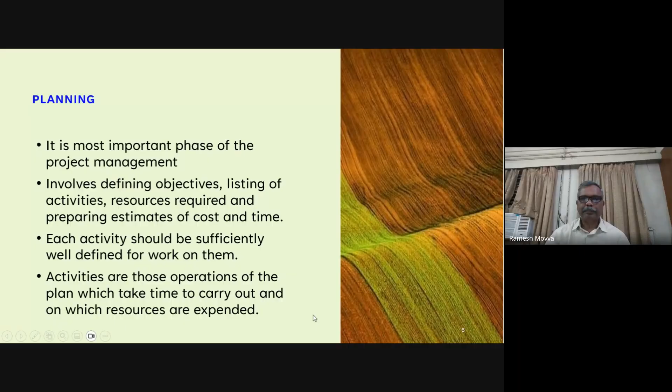Once your plan is ready, you go to the next phase, scheduling. Scheduling is basically integration of all the activities you have planned, assigning the durations and resources. In the earlier phase you have just defined the resources you need; in this phase you assign the resources and the sequencing of the activities - which comes first, which comes second, which can be done in parallel, which can be done independently, and which need to be done in sequence.

Once you interlink all the activities, you call that schedule the baseline schedule. In the baseline schedule, normally your target date will match your project requirement. This planning and scheduling phase is undertaken before you actually start the project, so you have to do a couple of iterations where you may be exceeding your budget, or exceeding your timelines, or both.

Then you need to go back and check where you can cut down on the project cost or cut down on the durations. After a couple of iterations, you will be able to come out with a plan which is within your budget as well as within your required timelines.

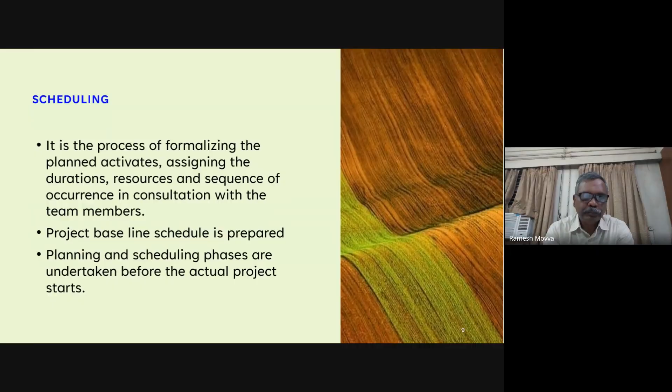Then comes the controlling phase. Once the project is undertaken, the project activities start progressing. For bigger projects we normally use software like Primavera or Microsoft Project. For example, in our Vizag steel plant, we have about 7,000 activities approximately for monitoring this 2.8 million ton steel plant, with about 16 zones and various activities in that.

If you have software to monitor the project, your life becomes easier. Complex projects cannot be monitored using a bar chart or arrow diagram networks. So we mostly use Microsoft Project and Primavera. Microsoft Project can also be used for planning purposes.

It is very easy to use and can be used for smaller projects. But we preferred Primavera because it has got very good scheduling capabilities and interlinking capabilities with activities, scheduling, monitoring, and it has a facility for adding resources. You can schedule it at regular intervals to arrive at what is your progress of project with respect to the cost you have spent.

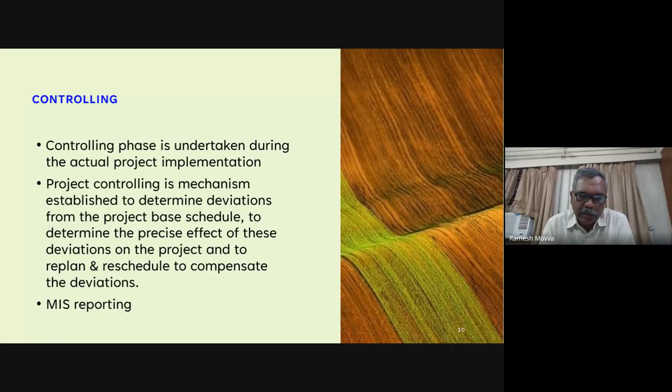After everything is done, we report the outcome of this controlling process to management in the form of an MIS report - MIS, basically management information system reporting. Once the reporting is done, it is reviewed by various levels of management, and then they act on those reports.

And the last phase of the project is closing. The closing phase is very, very important, because unless you complete and close the project and get out of the place, it remains pending on your project list for a very long time.

Once the project is commissioned, the client accepts that the project has performed. For example, in case of a blast furnace project, the performance is considered completed when it produces 66% of rated capacity. Say if rated capacity is 6,000, then about 4,000 tons production means the project has achieved its required goals and can be taken over. Once the project is taken over by the client, everybody gets relaxed.

In our practical experience, what we face is that a good amount of payment is made by the time the project is taken over - about 85% of the payment is given to the contractors once it is commissioned.

Then come the other activities like handing over of the site, preparation of as-built drawings, or preparation of final bills. All this gets pushed to the backbench. They also have to prepare all the lessons learned and document what you actually built - preparing an as-built schedule as well as as-built documents.

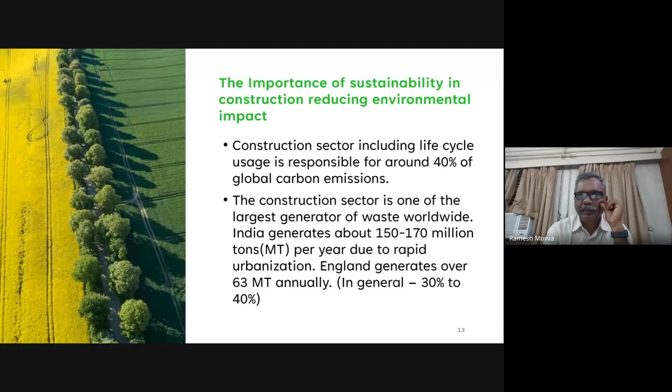So this is a very huge figure that needs to be tackled in future. Actually, there is no regulatory compliance - no mandated regulatory compliance for green emissions to prevent environmental degradation or use of environment-friendly materials in any part of the world.

But the World Green Building Council is a body which consists of various - every country is now trying to take care of all these environmental related sustainability policies. So now the Green Building Council has put up resolutions: by 2030, all new constructions and renovations will have at least 40% less embodied carbon.

This embodied carbon is basically when you use materials, including steel, cement, insulation, energy, piping, and all plastics. And all new buildings must be net zero operational carbon - that means when you are occupying the building and using it, the carbon emissions must be zero. By 2050, all new constructions and renovations will have net zero embodied carbon as well as net zero operational carbon.

But these targets are only voluntary on the part of the various governments. However, in coming years we may see some regulations where it may mandate certain laws and regulations to control this phenomenon.

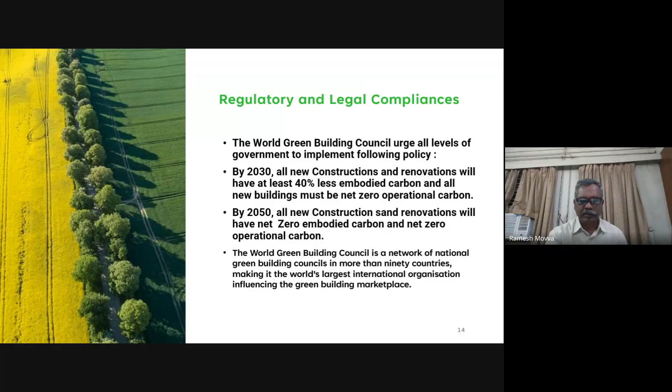So what is sustainability in project management? It involves incorporation of various environmental, social and economic factors throughout the project lifecycle, not only in the design stage but also during execution of the project.

We have these environmental factors already in place, where if you want to build a factory or an industry, they have to conduct environmental feasibility studies - that means how the industry is going to affect the environment around that place, like pollution, and relocation of the residential buildings present at present in those areas.

Then they also have to study what are the pollutants generated by that industry, and how people are likely to be affected, etc.

When the Vizag steel plant was made, at that time about almost 25,000 hectares of land was acquired, where villages by villages were asked to vacate. This has impacted many, probably a few lakhs of people got affected. However, the government made arrangements for rehabilitation of those people in the nearby areas.

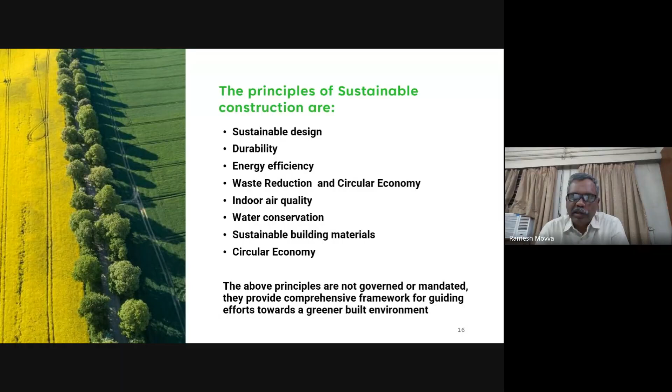So the basic principles of sustainable construction, there are 7 principles broadly listed. However, these are not like a Bible - you can have some more processes or stages where you can add, delete, or merge together, depending on the project you are building. Maybe this gets a little modified for a residential building, or it may get modified for an industrial building. These are broad guidelines where you can divide the various stages of the sustainable project management plan.

The first step is sustainable design. The sustainable design aspects need to be taken care of when you are designing, when you are planning a project. You have to consider all the present available technologies to reduce the carbon footprint, and various energy efficient green materials and energy efficient technologies to reduce the carbon footprint.

And also you have to adopt a design - once you make a plan or a design, there are certain third-party agencies which check your plans or designs with respect to certain guidelines. One agency is BREEAM, which is basically the Building Research Establishment Environmental Assessment Method, the world leading sustainability certificate system for buildings.

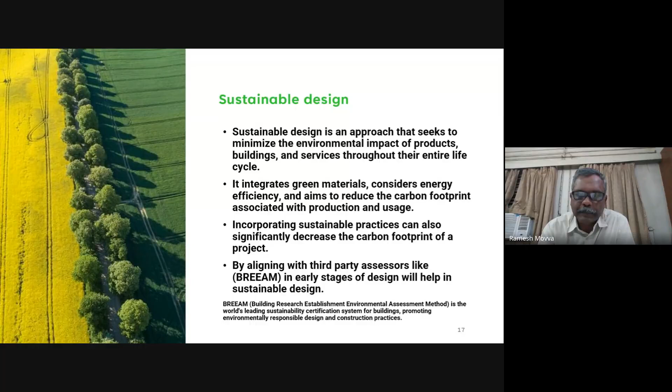I'll show a few buildings where these types of technologies are being used and also get certified by the various regulatory agencies. The durability aspect - you may be using materials and techniques which are available at present.

It may be a little costly or expensive, but in the long run these materials are durable. If you use good quality paint outside, for example, you need not renovate or repaint it for maybe 5, 8, 10, 12 years down the line. But if you use material that is available in your local market, it may get faded out after a couple of years, and you may need frequent maintenance or repainting.

The contractors who are building residential buildings nowadays are trying to cut corners at every place. So there must be some regulations or third-party agency inspection. Once your plan is approved by the municipality corporation or RERA, whoever the agency is, there is no further monitoring - they normally just give the okay based on the materials declared for concrete, paint, and construction in general. So subsequent to approval of the plan, during construction, there is no monitoring mechanism to check whether good quality materials are being used. This is one of the important aspects - probably some regulation needs to be done in this area.

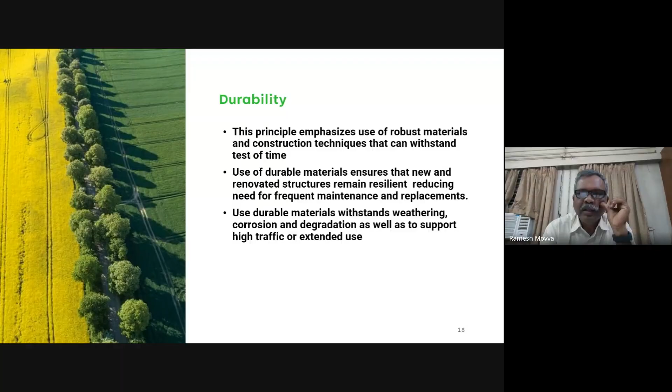Then comes energy efficiency. This refers to implementing building technologies, facilities, or designs to minimize energy usage. There's a standard saying - the energy you save is twice the energy produced. That means once you save energy, that same energy can be used at some other location, so you're not only saving it but enabling its usage elsewhere.

The energy producing industry is slowly shifting into renewable energy sources. But in India, even now, probably 60% of power is still generated from fossil fuel based power plants. By adopting energy efficient practices, we will be able to decrease carbon emissions into the environment, by which our planet will be saved.

Some aspects to be considered for energy efficiency are renewable energy systems like solar roof panels. Some places, very rarely, you find small wind turbines in residential buildings which power up part of the requirements. Then energy efficient appliance technologies, like using LED lights, or systems already implemented in hotels and big office spaces that detect a person's movement, automatically switch on the lights, and automatically shut off the lights and other facilities when no movement is detected.

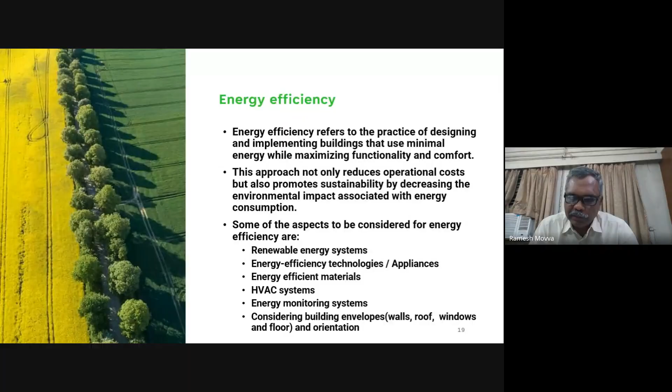Then comes waste reduction. When you make an industrial building or residential building or any type of construction, most of our buildings are demolished before we go for a new construction. Maybe in future we may come across designs in such a way that we will just remove the inner walls, or remove the ones which are not usable, then use the same frame to make a new building.

Or using prefabricated components in the building envelope like walls and slabs, with prefabricated buildings made using prefabricated steel structures at a workshop location. When using a workshop location, the efficiency of production increases and wastage reduces, and the quality of the components will be very good, because we have robotic machines or factory high speed building machines where production will be more. These things will definitely make your erection activities much simpler, with little modification on site, saving a lot of money and time, which in turn adds to profitability.

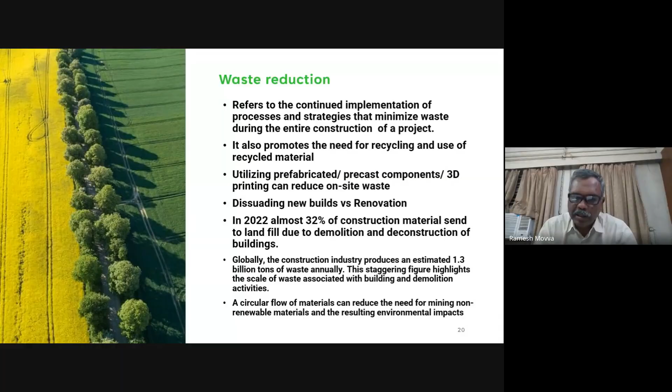Then comes indoor air quality. The paramount importance of any building or residential complex is that the inhabitants should be comfortable while using the accommodations or facilities they have been designed for. So when people start occupying, they should not complain that it looks ugly or the finishing is not proper, or that paints with very high volatile matter have been used, so that for a few months or a year they keep feeling the smell of the paint.

Those things should be avoided, so that people will be comfortable staying in those buildings. By using energy efficient dehumidifiers, or by designing proper plumbing fixtures so they will not leak. I find most residential apartment buildings have some leaks somewhere, either in plumbing fixtures or sanitation fixtures. So there should be very strict quality checks, because once you find a leak, identifying it itself is a Herculean task after a building is occupied. So while designing and constructing, you need to be very careful about these systems, because they get embedded in the walls once built.

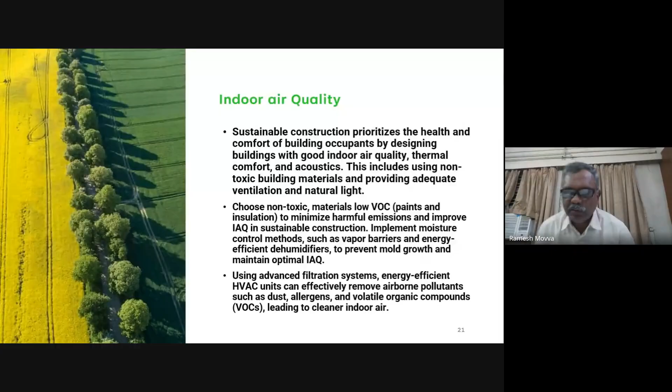Then water conservation - this is one of the key aspects of sustainable planning. Already a few measures are being implemented to conserve water. Like other aspects, to reduce water consumption includes fixing efficient plumbing fixtures.

What does it mean? You have a flush set with two taps - one for a small requirement and the other for a bigger requirement. Also the volumes are smaller now; earlier we used to have very big flush tanks, now it's getting shorter and smaller. Same with shower heads - you may have very large heads with very big holes which drain more water than required. Those fixtures can be selected judiciously, like in the kitchen you don't need very high volumes of water to wash utensils, so there are fixtures available now which deliver a high jet type of water with less consumption.

Next, rainwater harvesting. This is already in place in many of our residential buildings. They have a small pit where all the rooftop collected water is directed into the pit, and the pit percolates the water into the soil.

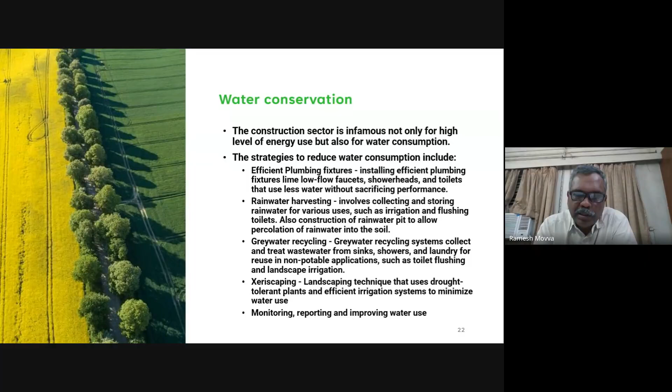Then you can install a monitoring system to check your water consumption on a daily or monthly basis, so that you can optimize consumption. I think now a few buildings are installing those meters - each apartment has its own meter, one for washing areas, one for other uses. The basic purpose is to charge residents based on a fixed quota, and beyond that they get charged, which also helps in monitoring and reducing consumption.

Then using sustainable building materials. Now these are all newly designed materials versus conventional material like stone, cement, steel, etc. As our previous resource person explained, a lot of new materials are being developed or explored for use to reduce the carbon footprint. Probably you can use locally available stones, gravel, and stone dust, etc. Some places don't have stone dust around so they use sand, but sand comes from rivers, which is becoming scarce day by day.

You may be using reclaimed steel, bricks, insulation material, etc. There are some materials now being propagated like hempcrete or mycelium-based insulation - these basically have a very dense root structure, which can be made into panels and used as insulation material. And modular prefabricated components - as we were discussing earlier, those made in factories - this is basically for residential purposes, while industries are already using this concept.

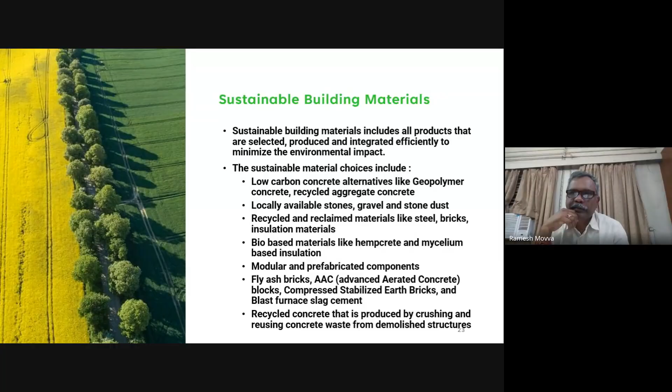Now new projects are being planned in different parts of the world to have carbon neutral cities - meaning the amount of carbon consumed is saved elsewhere. For example, UAE is building a Masdar city where carbon emissions and carbon footprint will be zero. It will likely house about 15,000 residents.

A very interesting project by Saudi Arabia is a futuristic linear city - a longitudinal city with two skyscrapers, each 500 meters high and 200 meters wide, spanning about 170 kilometers. They are planning to complete it by around 2034, the year Saudi Arabia is hosting the FIFA World Cup.

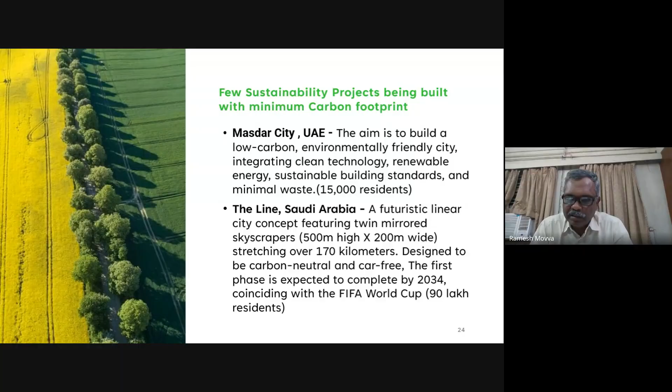Once built, it will be a green building construction with zero carbon footprint, estimated to house about 90 lakh residents. For accommodating these people, they are making huge facilities like recreation areas and special economic zones in the surrounding area. Probably they are thinking of sustaining their economy without oil, so with the money they have to invest, they are coming up with these new initiatives - though it is a very expensive project.

In India nowadays, the concept of green sustainable building is catching up. Everybody is trying to say they have the concept of saving energy - like Suzlon, a company specializing in making wind turbines and executing wind turbine projects. Taj is also trying to say they have a sustainable, carbon-neutral building.

These are a few buildings which are not exactly carbon neutral, but at least they have implemented certain methodologies where energy saving is considerable. I'll just show these buildings as an example.

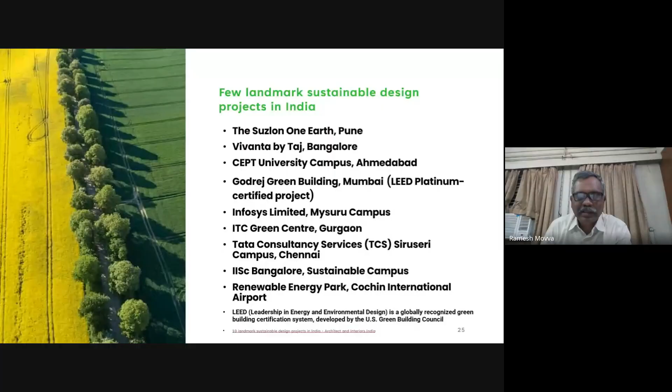Sir, the tab is not visible. Not visible? Okay, yes, okay, one second. Share. Okay, I'll come back to the presentation again, I have to share this tab now. Okay sir.

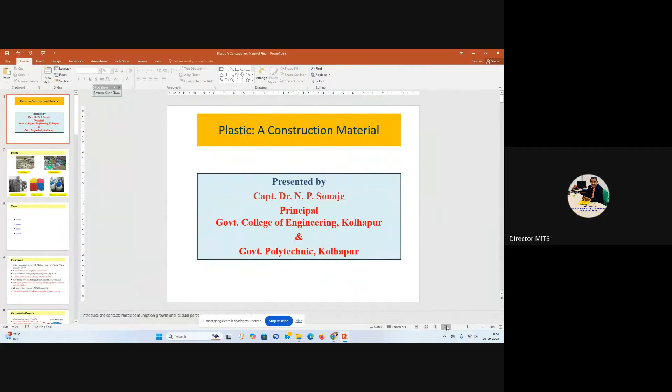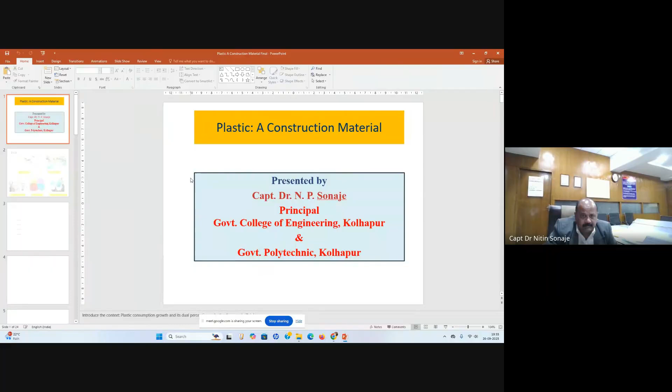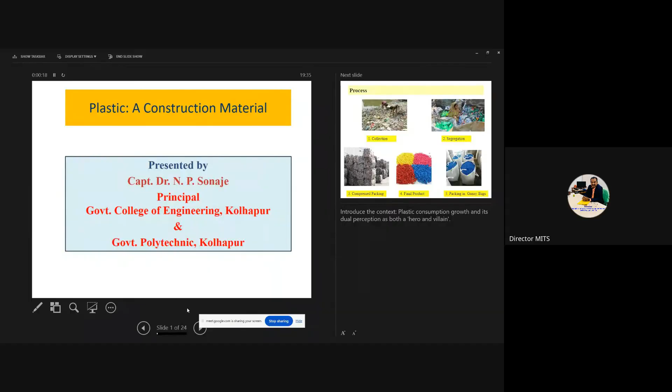Enter screen. Stop sharing. Share. Enter screen. Is my presentation visible to you? Yes, visible, sir. Make it full screen. Two screens are visible, sir. Display first screen. Make it a slideshow. Click it. Slide show. Can you see one slide or two slides? Two slides are coming, sir. I think you need to click the next button, sir. Tab. Yes, correct, sir.

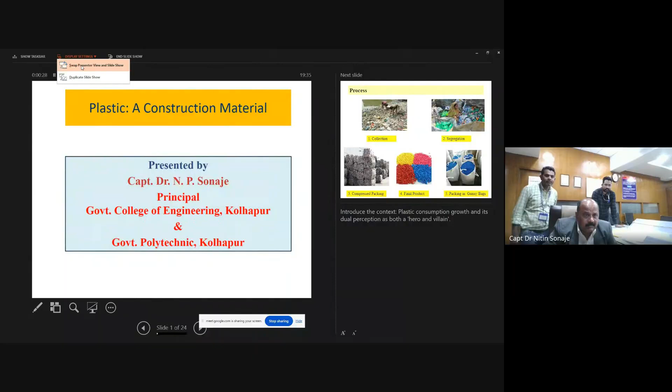Right, sir. So as I said, putting these two experiences together—auditor of plastic waste and civil engineer—I made this combination, and I'm trying to present a few ideas about plastic which can be used as a construction material.

Let us see, we can see plastic everywhere. In my first picture, it shows how it spreads: we throw plastic in dustbins, from the dustbin it goes to the dump yard, and from the dump yard garbage collectors collect this plastic garbage, which goes to one of the places, the recycling industry.

Or maybe a scrap vendor, and they segregate it like this. After segregation, in the same industry, they compress it and make such compressed packing, and send it for further processing.

When this compressed packaging goes to the industry, from raw plastic they make granules—these are the final granules we get from raw plastic. These final granules are put into gunny bags and finally dispatched for use, maybe in the construction industry or for making other products.

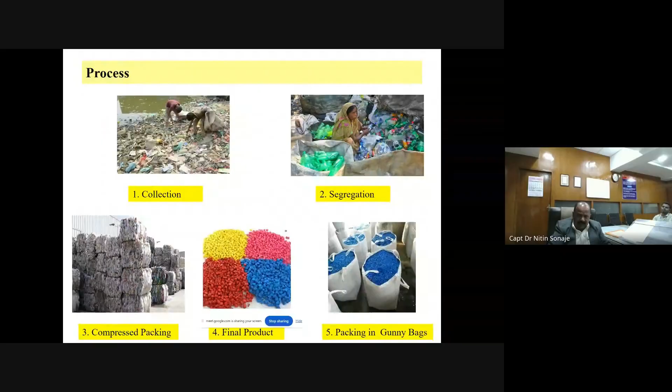I'll show some videos on this, from the collection process to the packaging process, how it comes. These are industrial videos where I had conducted this audit. Let us see these videos, how it looks. These videos are from industries.

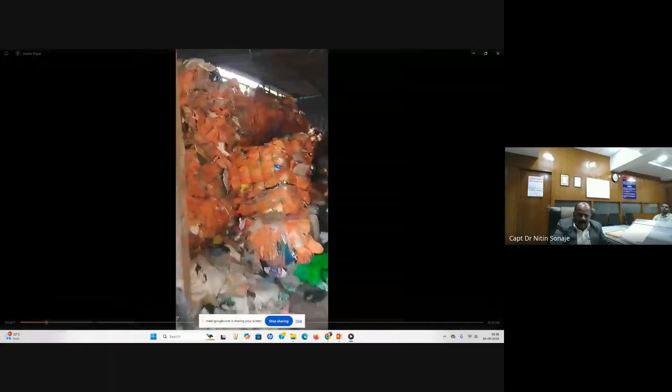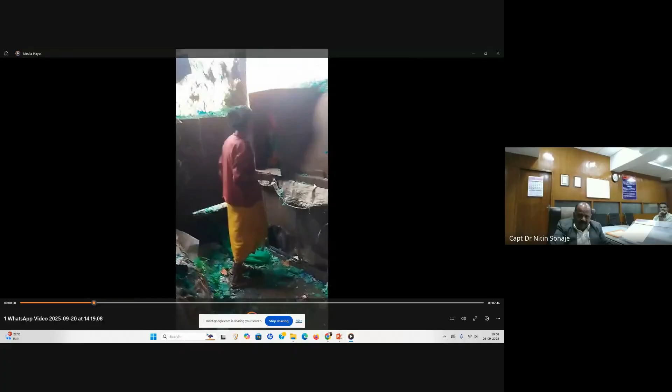See, this is the garbage collected in the industry. This is the way they stack it. This is called air wash—this garbage is washed with air.

Then after washing, the crushing of this plastic is carried out. They make smaller pieces of the plastic. These are the crushed plastics.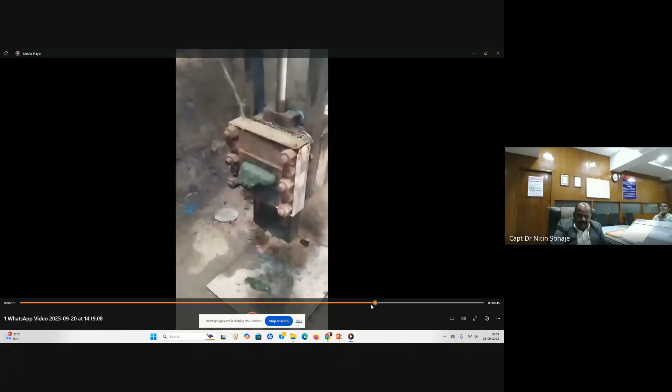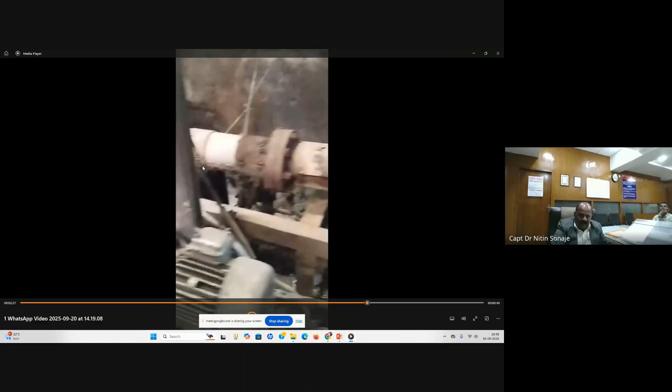From the crushed plastic, it is melted—see how they melt it. This crushed plastic is put in the oven and melted there, forming cubes of plastic, called plastic balls or cubes. These are prepared from the raw plastic.

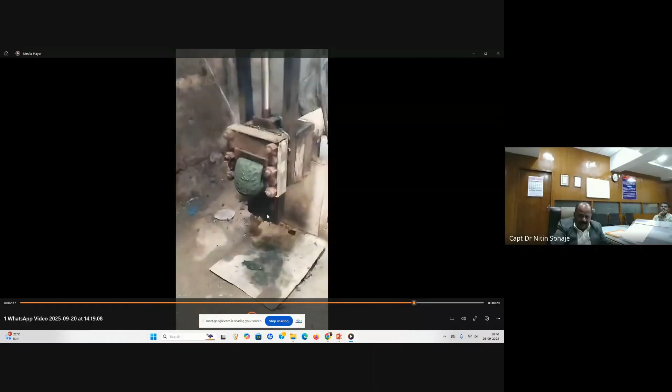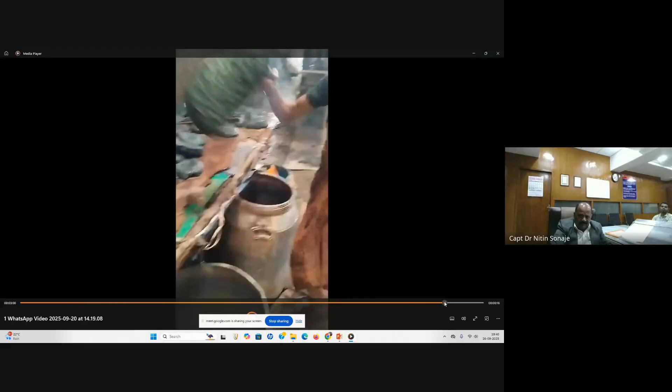They call it a cake, a plastic cake—not a birthday cake. It's very hot; after solidification it gets cool, and it's heavy.

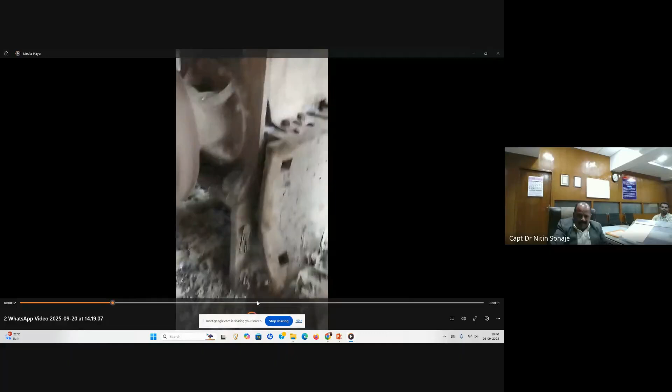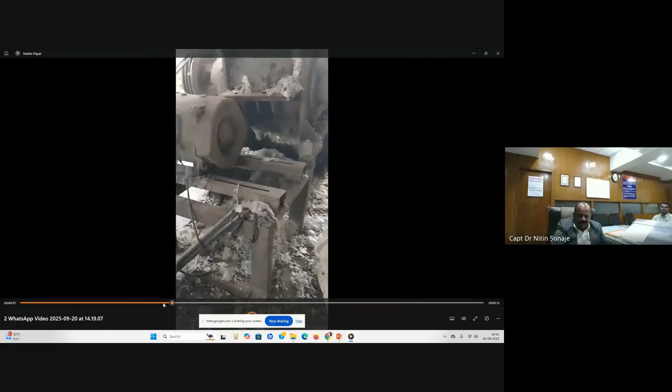After seeing this video, I'll take you to the next one. Now see, these are the gunny bags. They are putting it in this particular machine, making it into small pieces, and washing it so all dirt can be removed.

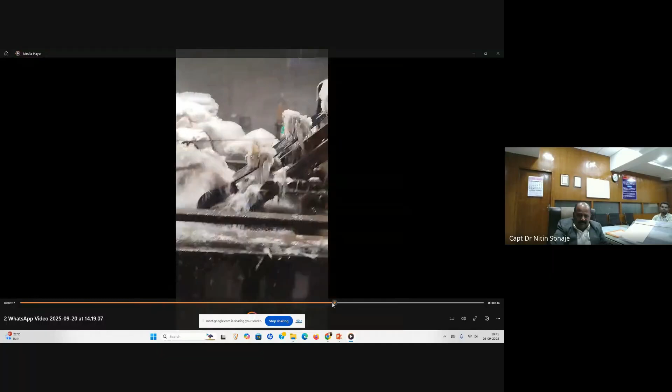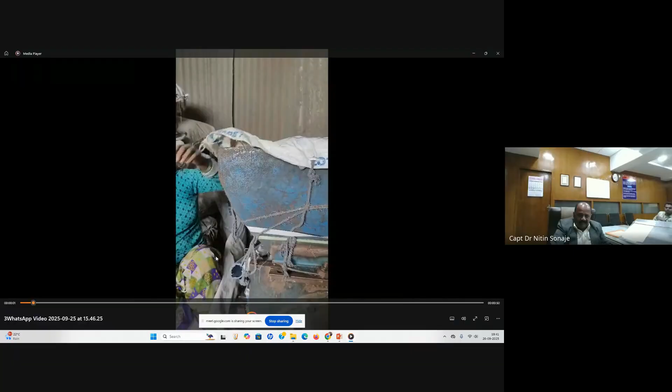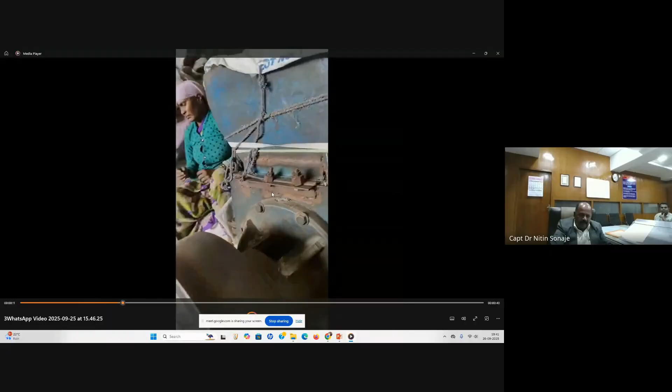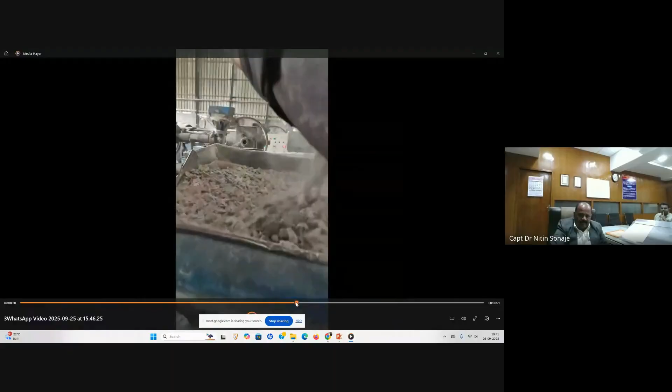Okay, coming to the next one. Remember the pieces and cubes you saw in the earlier videos—see how the process goes. From those cubes, they again make smaller pieces. This machine is called the extruder machine, and they make it into pipe shape.

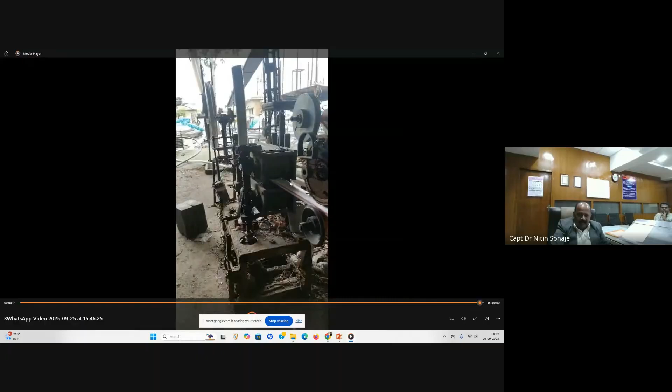And coming to my last video—this is the most important one. Now this shredded material is sent to the extruder; this is called the extruder.

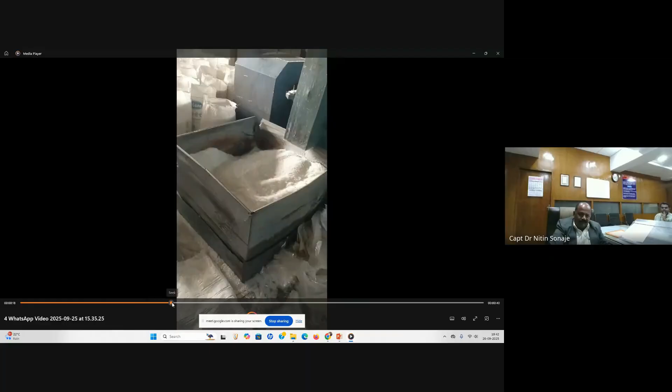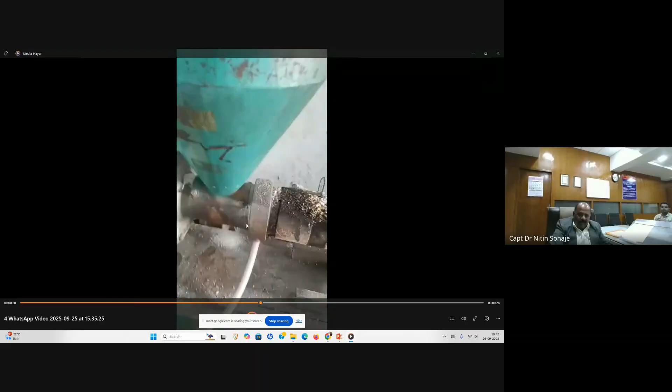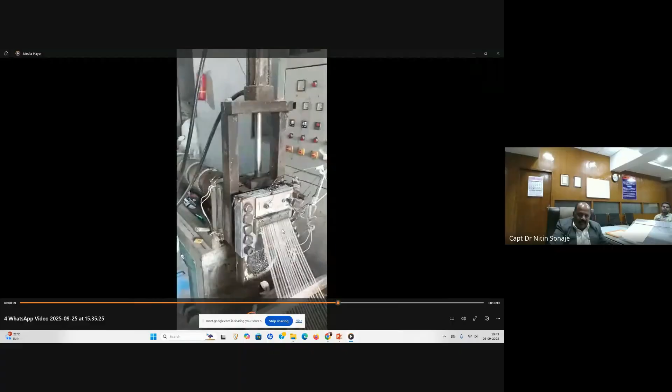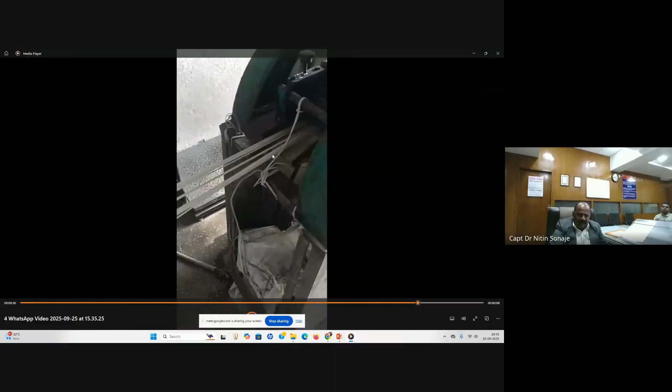Material is heated over here. Then from this end, these are the plastic thin wires, you can see very hot. They had dumped in the water, and now it's cold plastic wires. Here they are cutting it, shredding it, and making the granules. So these are the granules coming out. This is how the entire process of plastic manufacturing from the garbage to final plastic product works, which we generally utilize for all our purposes. Even your oil pouch that you bring home is made in the similar fashion from these granules.

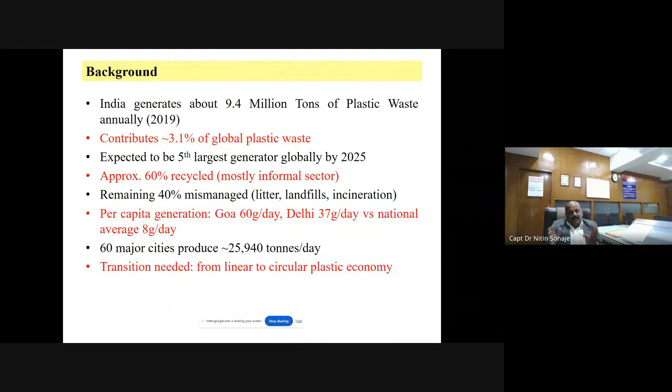It has been observed that 60 major cities produce about 26,000 tons of plastic waste per day. And for this, what is required is a shift from linear plastic economy to circular plastic economy. At the end of my presentation, we will see what this linear and circular plastic economy is.

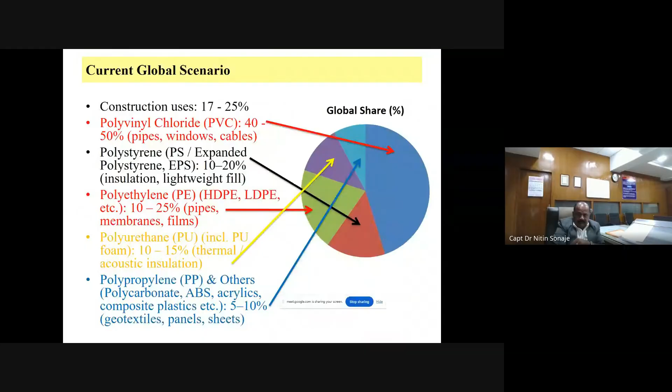If I put the current scenario, we have recycling methods in India, that is mechanical recycling - we just now saw some videos, these are called mechanical recycling. This plastic is again used as a recycled material in road construction, cement kilns, and waste to energy. Waste to energy is nothing but oil extracted from the plastic, and that oil is used for energy purposes.

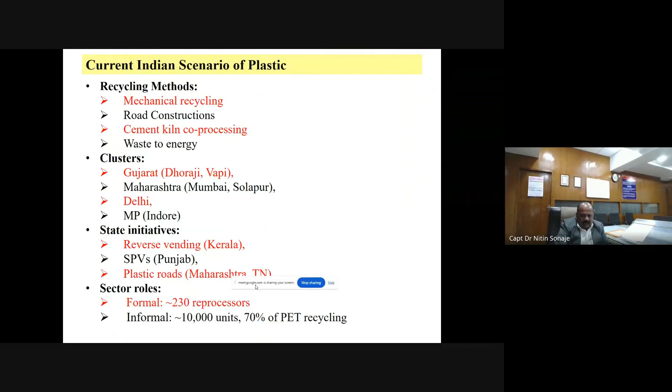So major clusters of this plastic industry are based in Gujarat, at places called Dhoraji and Vapi, in Maharashtra - Mumbai and Solapur, Delhi, and Indore in MP. Various states in India have made some initiatives - Kerala made it reverse vending, Punjab has SPV, Maharashtra and Tamil Nadu are basically in plastic roads. Out of this, the industries, we can say, 230 industries are reprocessors, that is formal industries. Informal, there are about more than 10,000 units, wherein 70% PET is recycled. This is what the Indian scenario is.

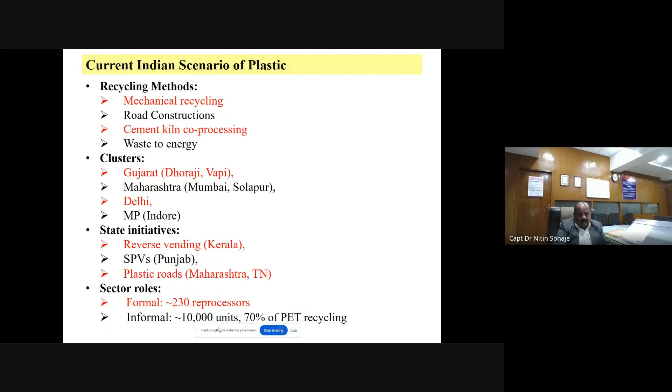In the Indian scenario, as I said earlier, the use of plastic in construction is up to 25% globally. In India, it is about 16%. This PVC, PE, PU that I already told you.

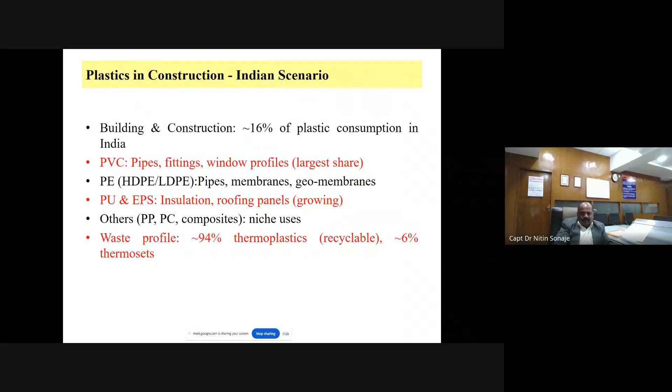If I compare Indian share and global share, PVC in India is 40 to 50%, same as global. PE globally is 10 to 25%, in India it's 20 to 30%. PU and EPS are 10 to 15% both in India and globally. PP and others are 5 to 10%.

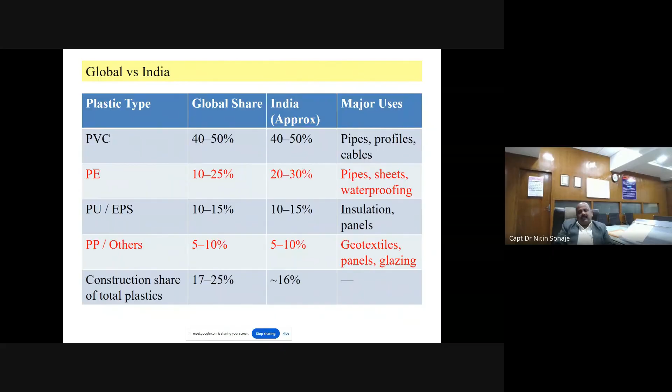But there is a difference in construction share. Plastic as a construction material is used 17 to 25% globally, but in India it is approximately 16%. So we have scope to reach the global average.

Now there is something called virgin plastic. What is this virgin plastic? It's not recycled plastic, it's the original one. Virgin plastic is used in the construction industry, and its benefit is moisture resistance. If proper technology is used, it gives more strength than concrete, and it is easy for manufacturing.

Common types are PVC, PE, and acrylics. Its uses are piping and plumbing, and PVC flooring, which is easy to clean, non-porous and durable, and nowadays in high demand. Also electrical components as an insulator, cable jacketing, electrical conduit, switches and outlets, since we use this in the construction industry.

Glazing and windows use acrylic and polycarbonate as an alternative to glass. Earlier we used glass, now we use acrylic and polycarbonate instead. Also skylights and protective barriers. We use this virgin plastic for cladding and wall panels due to its lightweight, and also as sealant, adhesive and membranes for watertight seals, barriers and waterproofing.

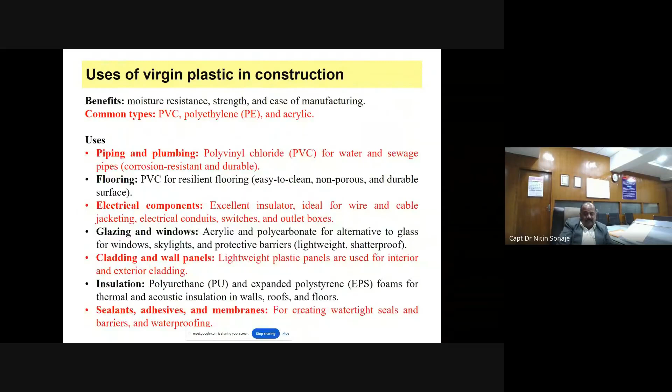Coming to recycled plastic, earlier we saw virgin, now recycled. It's durable, water resistant and eco-friendly, and is an alternative to traditional products. The first use is as a concrete additive. We had seen shredded plastic in our videos; that shredded or powdered recycled plastic can replace some part of the aggregate and be used as a concrete additive.

If we use the proper proportion, research says it's 15% more durable, and when plastic is used with gamma radiation, its strength increases, as research shows. One of my students carried out this work, and I also found that after adding this plastic in some proportion, it increases the strength. But if you add more plastic, the strength reduces.

Coming to road construction, it is mixed with bitumen to create more resilience to cracking and water damage.

Recycled plastic lumber is basically an alternative to traditional timber. Even if you visit monuments or hotels, from the exterior it looks wooden, but if you closely observe, it's plastic lumber. It's also used for insulation, which I already covered, and for formwork in shuttering. Instead of using plywood and steel plates, nowadays this shuttering material has been changed to recycled polymers, which are more durable and water resistant.

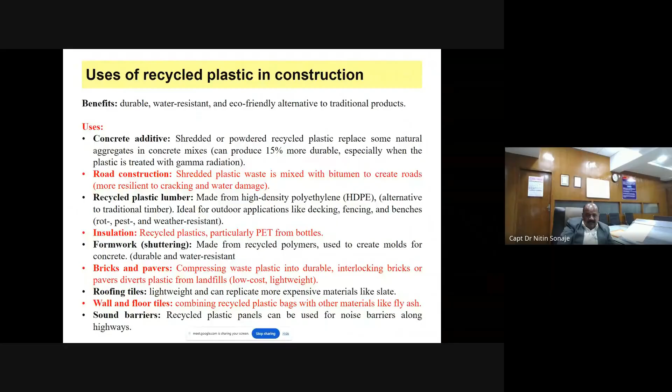Nowadays in the market, bricks and pavers are coming up, made by compressing waste plastic into durable interlocking bricks or pavers, which diverts plastic from landfills. Roofing tiles made of plastic are also coming into the market, replacing the previous mud or soil roofing tiles. There are also walls and floor tiles, and sound barriers. These are some of the recycled plastic uses in the construction industry.

What are the advantages of this? It's durable and resilient, with less corrosion, no rotting, and no pest resistance required. Its weather and impact resistance is very high. It has a long lifespan and is cost effective over the total lifespan of the plastic. Initially, in some cases, cost might be more than the traditional material, but over the entire life, it's cost effective.

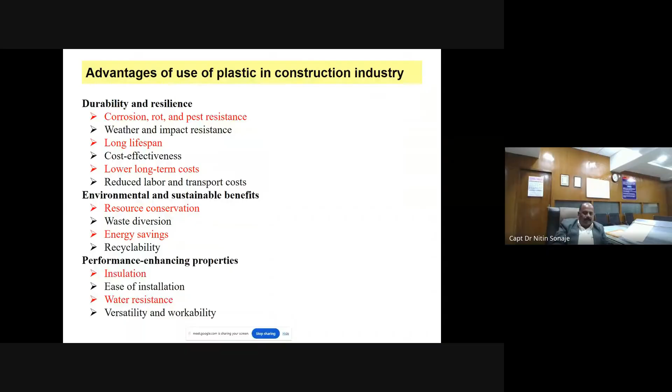It reduces labor and transport cost. Coming to environment and sustainability benefits, it's resource conservation, waste diversion from landfill to utilization, energy saving since transport cost is reduced, and recyclability. It also enhances performance properties like insulation, ease of installation, and water resistance. It's versatile and workable.

So what are the global challenges of plastic use in the construction industry? The growth of plastic use is only 9% annually, so it has to be increased. By 2040, 1.3 billion tons of plastic will be thrown into the environment. Globally, 14% of plastic is recycled; in India it is 60%.

Globally, it's only 14%, so it is changing the global environment scenario. 500 billion single-use plastic bags are used annually worldwide. That's the reason the Indian government is making strict compliance against the use of single-use plastic. They have imposed heavy penalties, but still people go to the market and ask local vendors, 'I'm not carrying my bag, can you give me a plastic carry bag?' So the vendor gives us a single-use plastic carry bag, which is less than 120 micron thickness.

91% of plastic is not recycled.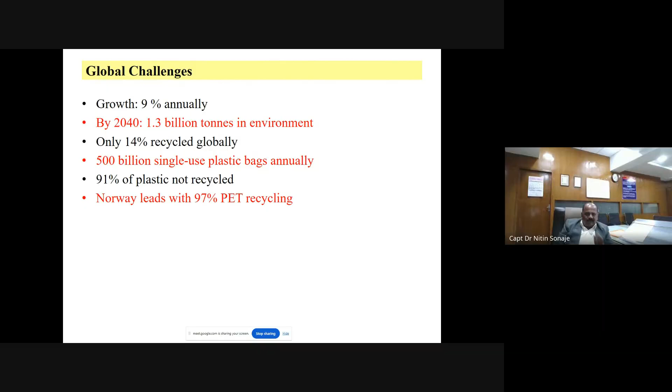What are the challenges in India for this plastic used in the construction industry? It's a poor segregation issue, which leads to low quality recyclates. And we are not getting a uniform mix of this plastic.

Even if I take the example of road construction, we don't get uniform specification or uniform characteristics of the plastic. Even when we put it in concrete, it's the same thing with recycled plastic. Yes, if it is virgin, then the quality we can get is a little bit better, I will say.

This plastic is collected through the informal sector, which is unsafe, unrecognized, and underpaid. You can see the roadside garbage collectors, how much he is getting, and all these things.

The data gaps are in recycling rate, polymer flows, and residues. Let me tell you, friends, when this final product of plastic, that is granulars, which I had shown in the second slide, the rate of sale of these granulars, very best quality granulars, is only up to 40 rupees per kg. And from that granulars, various plastic material is used, as I gave the example of your oil bag. That oil bag has been made from these granulars.

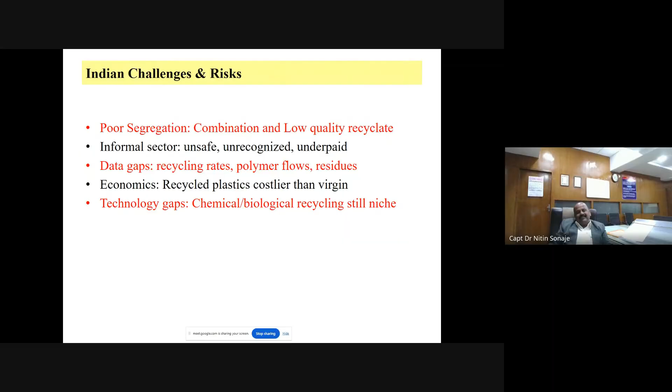So with this, what are the issues in India? It's littering and lack of awareness. Because whenever we come across these plastic carry bags, we just put them in the dustbin and they go to some dump yard, and the garbage collectors collect it and so on.

It's inadequate infrastructure for recycling. As I had shown in some of the industries, their infrastructure is lacking and how these people are working—that is inadequate infrastructure. There's failure to collect waste in slums and narrow lanes. In slum areas you can find a lot of waste lying over there. In India, 40% of our population is urban population, that is in the slum areas. What happens is they just throw this waste into the sewages.

Informal rag pickers are vulnerable. In India, 70% are registered facilitators for this, 20% are informal or unorganized, and 10% recycle at home.

So what are the opportunities of this recycled plastic in the construction industry? It's expanded use in concrete. Shredded or powdered recycled plastic like PET, PS, PVC as a partial substitute—not a full substitute, as I said. The research says up to 15% we are getting this result. So we have to focus on developing standards to ensure the resulting concrete meets structural requirements.

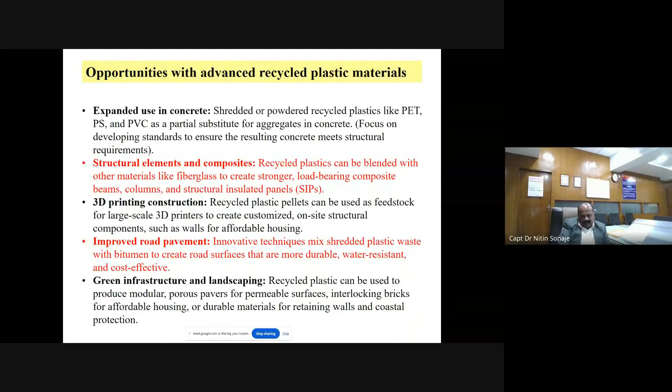Green infrastructure and landscaping: recycled plastic can be used to produce modular, porous pavers for permeable surfaces, interlocking bricks for affordable housing, and durable materials for retaining walls and coastal protections. This is how we can create green infrastructure and landscaping.

Now, opportunities with enhanced virgin plastics. Earlier we saw recycled plastic; now coming to virgin plastic—high performance facades and glazings. As in the earlier slide, these facades and glazing can be used, that is, lightweight facade and roofing materials, modular and prefabricated components, and lightweight plastic components such as windows and doors. If we use this, our speed automatically increases and it reduces on-site labor and cost.

Smart building integration: plastic components can be integrated with smart technologies like sensors and fiber optics. Plastic conduits can be embedded with sensors to monitor structural health or energy use. And let me tell you, this use has already started in dams and reservoir walls.

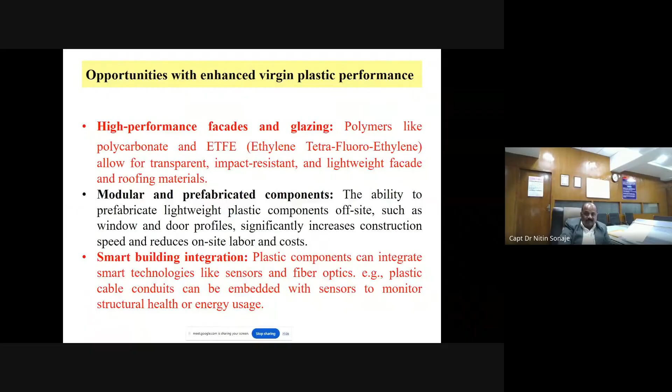So what are these opportunities to use these plastics? There is something called circular economy initiative. As I said in the very first slide, this circular economy is about creating robust infrastructure for collecting, sorting, and processing plastic waste, which will increase the supply of recycled material for construction. The circular economy means recycling again and again, where the losses are minimal.

Next is government incentive and policies. The government has made an incentive where if you are recycling this plastic, or converting these plastic garbages into granulars, you will be getting some carbon credits. Those carbon credits you can sell to another industry making the final products. Whatever carbon credits you get, the taxes are interlinked with the carbon credit. I being an auditor, we generally see how much carbon credit these recycled industries are getting, and whether it is really worth it or not. That is government incentive and policy.

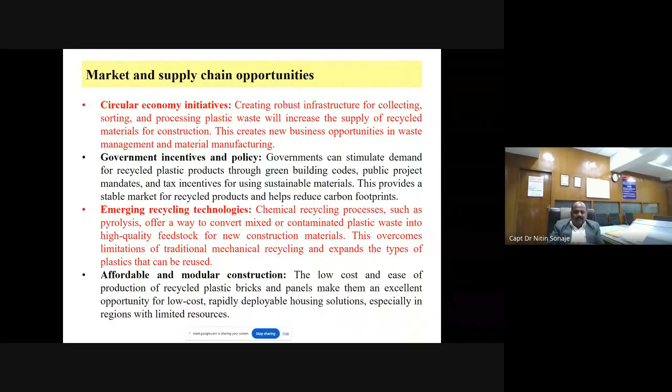It's affordable and modular construction. In case of low cost, it's easy for production of recycled plastic bricks and panels. It's an excellent opportunity for low cost housing, especially in regions where limited resources are available.

So if I define the linear plastic economy and circular plastic economy: the linear plastic economy follows a take, make, and dispose approach, which results in depletion of resources when you take it. When you make it, after making you use it, and after use you dispose it. That disposal gives environment pollution and creates a large volume of waste. That is called linear plastic economy.

Now coming on to the circular economy. This circular economy keeps resources in use for a longer period. It is an economic system designed to eliminate waste. It means using these resources as long as possible through reuse, repair, refurbishment, remanufacturing, and recycling. In simple form: reuse, repair, refurbish, remanufacture, and recycling. That is 5R. 5R is a circular economy.

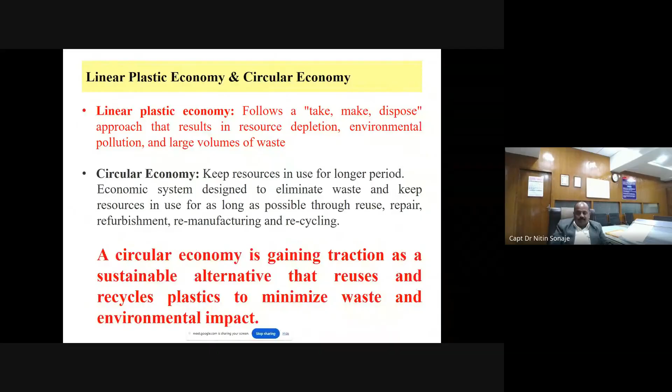So what is the shortcoming with this linear plastic economy? It's resource depletion, because every time we require new plastic, we don't reuse it. And when we don't reuse it, it generates massive waste. And when that waste is not recycled, what we do is send it to landfill, incineration, or just throw it in the environment, so it gives environment pollution. This environment pollution causes soil contamination, water supply contamination, toxic gases, and greenhouse gases.

Economic inefficiencies occur because resource prices are so volatile, since every time we have to take new plastic, and these prices most of the time cause interruption in supply.

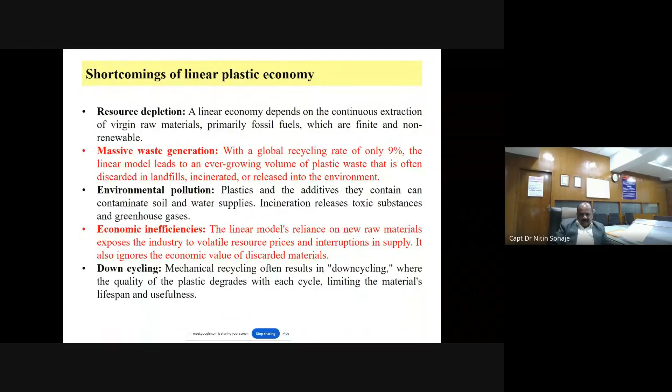Now coming on to the circular economy: design for circularity. In circularity, design modular components that can be disassembled and reused. That is what, as a civil engineer, we have to do. We have to design modular components so that they can be in circulation, giving greater flexibility, so they can be recycled and repaired.

Prioritize reuse and recycling. Reusing plastic products, such as plastic formwork for concrete, extends the lifespan and is more energy efficient than reprocessing. In this case, the initial cost might be more, but if you take the lifespan of this formwork, the cost is again reduced.

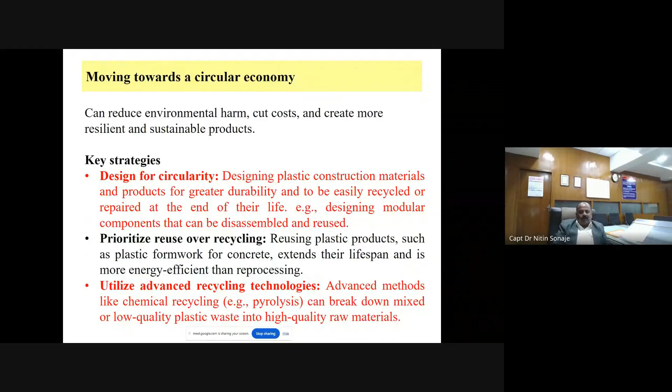Utilize advanced recycling technologies. Advanced technologies like chemical recycling, that is pyrolysis, can break down mixed or low quality plastic waste into high quality raw material.

Boost waste collection and reprocessing. Nowadays, most municipal corporations are putting stress on this waste collection and processing. N number of units are coming up, and we, as civil engineers or mechanical engineers, are giving third-party consultancy for this waste collection and its machinery for waste segregation.

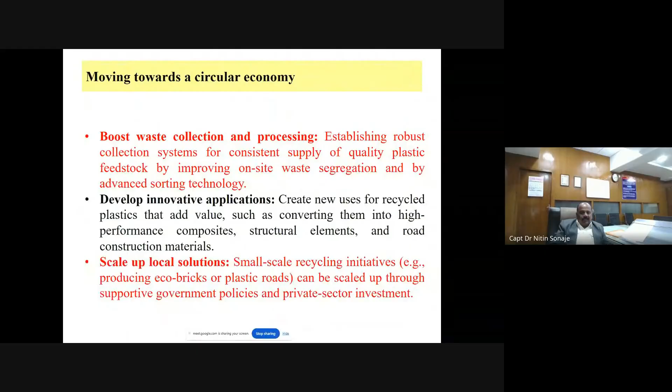Develop innovative applications which can add value, converting high-performance composite structures, structural elements, and construction materials. We need to put the focus on innovations and scale up local solutions. Producing eco bricks is a local solution, plastic road is a local solution.

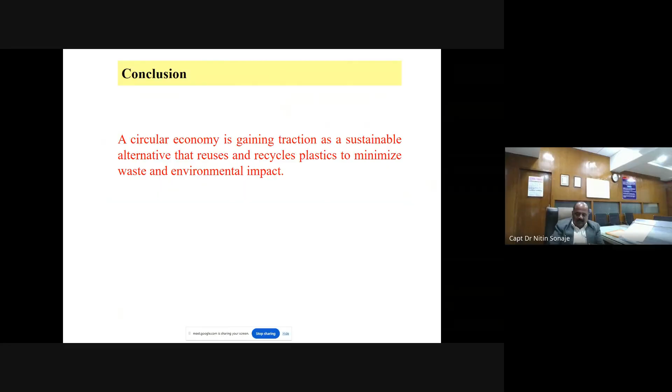It can be scaled up through government policies and private sector investment. In conclusion, as a civil engineer, if we look towards the circular economy, it is gaining traction as a sustainable alternative that reuses and recycles plastic to minimize waste and its environmental impact. So with this, if you have any questions, I will try to answer them to my possible extent.